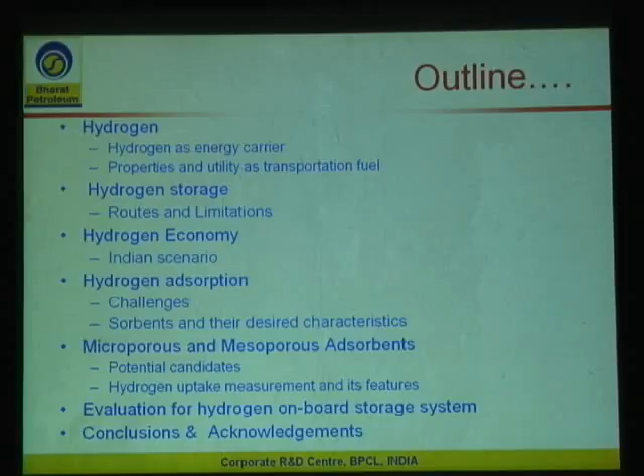Hydrogen, as you are aware, is an energy carrier and has got several advantages. It can be made from a variety of raw materials, including water splitting and fossil fuels, and has zero emissions at the point of use. However, depending on where you produce it or the starting material, if it is from fossil fuels, there will be emissions. Still, the overall well-to-wheel emissions, in both air pollutants and greenhouse gases, hydrogen gives you very low emissions compared to conventional fuels such as gasoline.

Fuel cell technology, for which hydrogen is fuel, is the major driving force for hydrogen economy and is fast emerging as a mature technology. So far the cost of fuel cells was a major impediment, but now the costs are really coming down, and this fuel cell technology is maturing very fast, and that is where hydrogen is becoming more and more interesting and important.

Another most important thing is hydrogen through fuel cells can achieve well-to-wheel efficiency of 22%, compared to 12 to 13% for gasoline and CNG in IC engine, and 18% for diesel in internal combustion engine. The overall efficiency from well to wheel, which is more important, is of course very high with hydrogen.

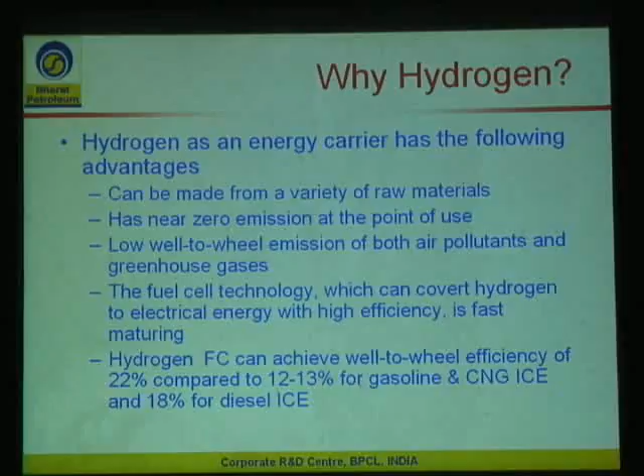Hydrogen as a fuel can be used both through fuel cells and in internal combustion engines as a direct fuel. When you use hydrogen as a direct fuel, there are advantages: characteristics such as low quenching gap, high diffusion coefficient, and wider flammability, which result in completeness of combustion, hence higher efficiency, and lean burn ability, leading to low NOx, which is very important. I will come to this practicality later, how this can be used along with CNG to reduce emissions in IC engines. It is also safe even in case of leakages in open air because of fast diffusion.

However, there are few problems when you use hydrogen in IC engine. High flame speed and low ignition energy are problems because they can lead to pre-ignition and backfire, which can be dangerous, and is unsafe if there is a leak in a closed space, like within a vehicle when it is closed.

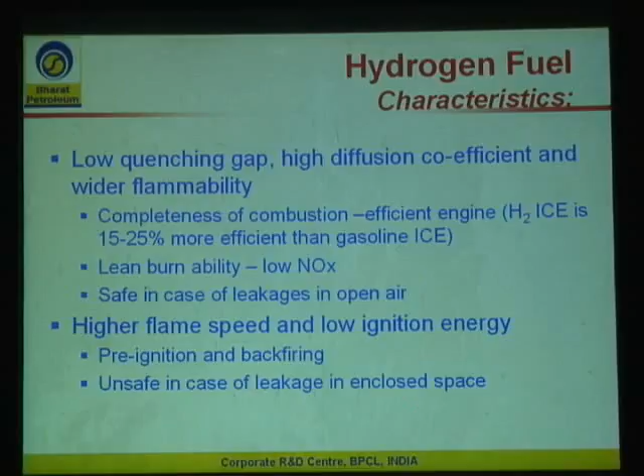The barriers to hydrogen economy are many, as you are all familiar, but onboard hydrogen storage today is probably one of the most important barriers which has to be overcome, which is the topic of today's presentation.

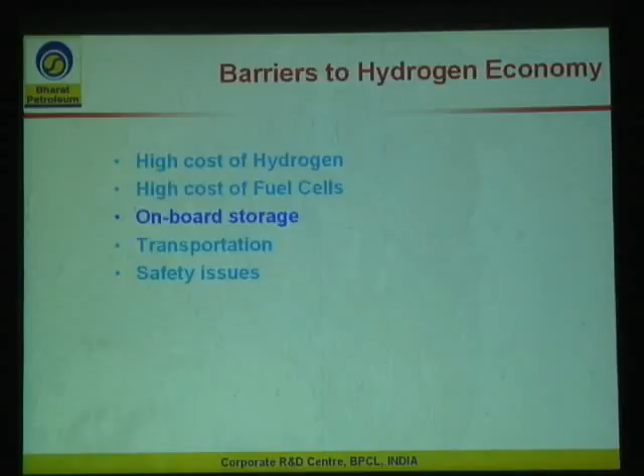Hydrogen storage limitations and challenges, probably you would all be aware, so I may not spend much time on this. I quickly go through. Weight and volume are the major problems. The hydrogen storage systems occupy huge volume and are very heavy. Efficiency is again a major challenge when you are looking at the storage systems. Whatever system you look at, whether it is compression, liquefaction, or storage in solid materials, you have to spend a certain amount of energy either to compress, liquefy, or to take out hydrogen from the storage materials.

Durability is important - those who are dealing with hydrogen storage systems on board would realize that it is not only important to have high capacity in the laboratory when the system is very fresh, but it has to sustain that capacity over a period of time, several cycles, and the ideal lifetime is 1500 cycles. Refueling time, of course, has to be fast enough. Cost is another major factor, and as developments take place, I am sure the cost will come down. And of course, as with any other fuel and systems, codes and standards will all emerge, and life cycle time and efficiency analysis in-depth study is required.

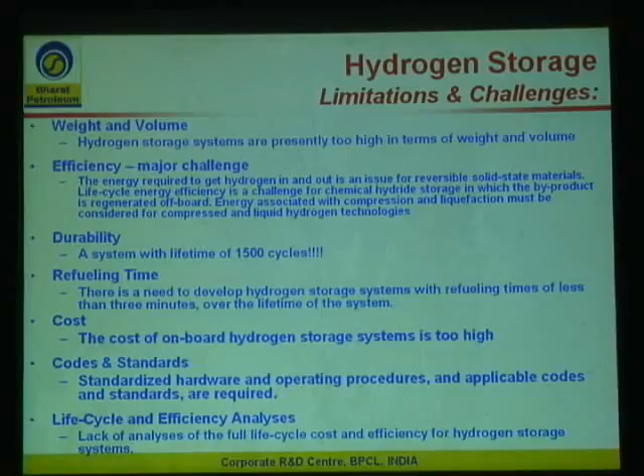Hydrogen storage targets, you are all familiar with - the earlier speaker also talked about this. I would just like to draw your attention here to these targets: one is 6 weight percent by 2010, and 9% further along, as the earlier speaker showed your targets as 6% by 2010.

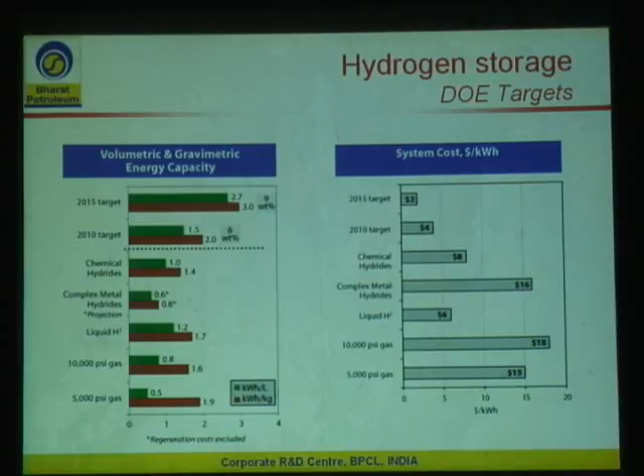In India, there are a number of research programs undertaken related to hydrogen economy. One of the important programs is the National Hydrogen Energy Board program of the Department of Non-Conventional Energy, Government of India. It is a 10-year program, and the expected budget is about equivalent to $70 million.

Ministry of Petroleum and Natural Gas, Government of India, has a 5-year program expected to spend about 20 million. This is mainly for oil industry refineries. Then there is CSIR, Council of Scientific and Industrial Research. The research initiatives there cover production, mainly autothermal, storage, including carbon-based storage materials, and of course fuel cells.

The other initiatives include the core group on automotive research, the REVA program, a private initiative. It's a private company in India producing electric vehicles running on batteries recharged from grid power. They are now working on fuel cell based hybrid vehicles. And Benares Hindu University has been working for a very long time on metal hydride storage.

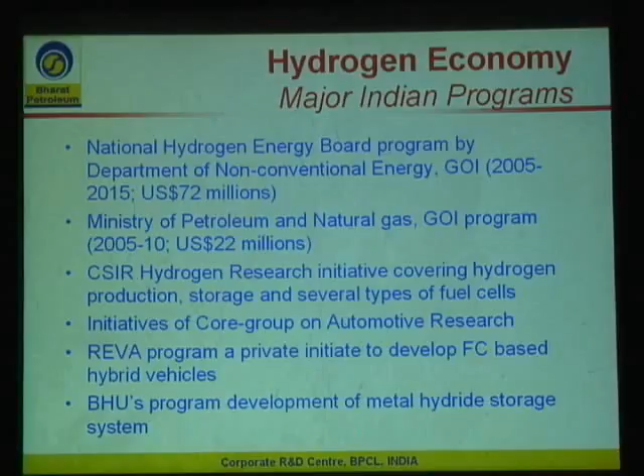The National Hydrogen Energy Board programs have 3 types: short term, medium term and long term. Under short term, use of 10% and 30% hydrogen in admixture with CNG in buses and small and large three-wheelers. This program is for about 2 years.

In India, CNG is picking up very fast, and in New Delhi there are more than 10,000 buses. All public transport runs on CNG - taxis, three-wheelers, and buses. This is now extended to other cities. When we switched over from gasoline and diesel fuel to CNG, it has definitely brought down pollution with respect to particulate matter, SOx emissions, CO and things like that.

But NOx is a problem there. In fact, there are contradictory studies that show even NOx emissions have increased with CNG. When you mix hydrogen with CNG, 10 to 30%, some studies showed that there is considerable reduction in NOx emissions.

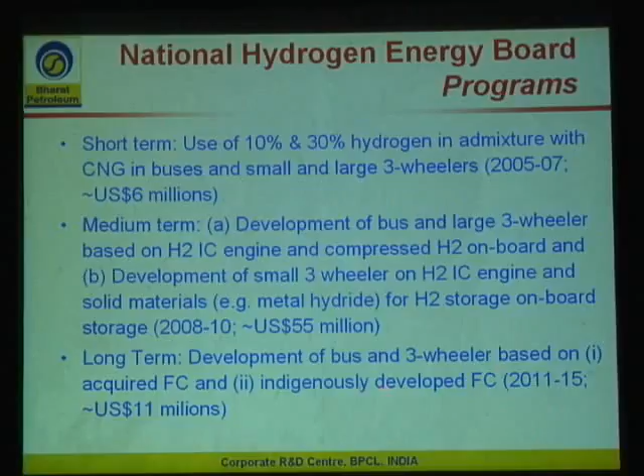Long term, of course, bus and three-wheeler. Three-wheelers you see everywhere would be coming because the population of three-wheelers is pretty high in India. Initially, of course, this would be acquired fuel cell technology, and later on indigenous development. These are the programs.

The next important program is by the Ministry of Petroleum and Natural Gas. Here the focus is on production, storage and distribution, and of course application-oriented research in IC engine three-wheelers, and examining the economics of use of metal hydrides and fuel cells from a long-term perspective. These are some of the programs which the Petroleum Ministry, mainly the oil companies - I come from Indian Bharat Petroleum Corporation Limited, the refining and marketing company - we are also working in these areas.

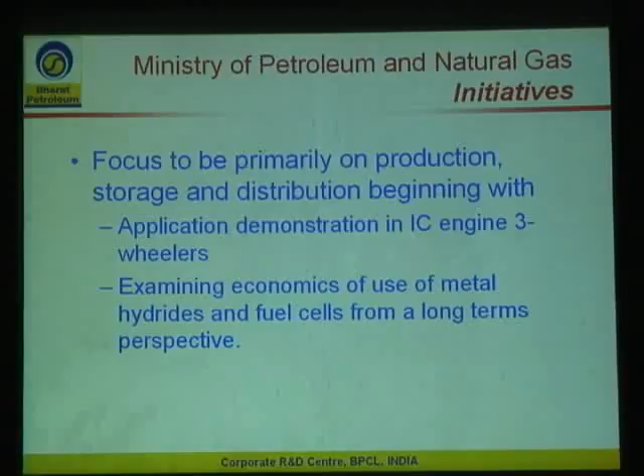The other program is from the auto industry, the Society of Indian Automobile Manufacturers. They have a program to develop hydrogen IC engines and demonstrate a fleet of about 1,000 vehicles by 2008, including 200 buses, 500 small three-wheelers and about 300 big three-wheelers.

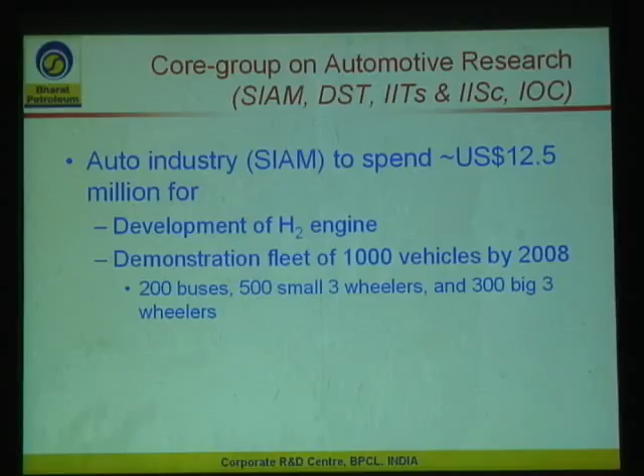At Bharat Petroleum, where I am working, our corporate R&D center has undertaken research programs on development of materials for hydrogen storage - adsorbents based on physical adsorption, mainly microporous and mesoporous materials, and complex hydrides, metal hydrides and complex hydrides. A pilot study using a three-wheeler onboard with compressed hydrogen in cylinders and metal hydride canisters. I am going to share some of our results on this.

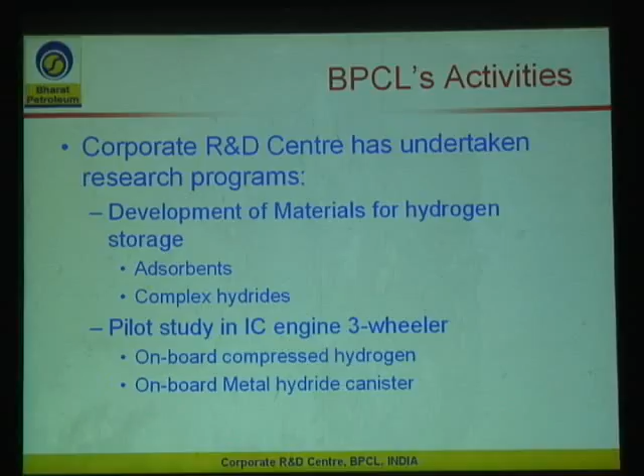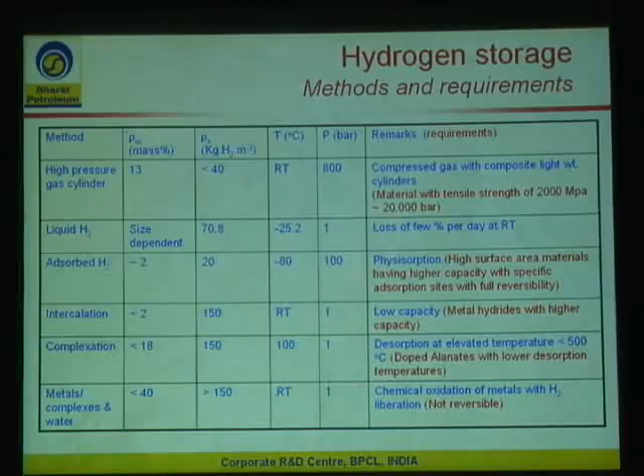Hydrogen storage materials - maybe you are familiar with this. With lack of time, I would skip this slide.

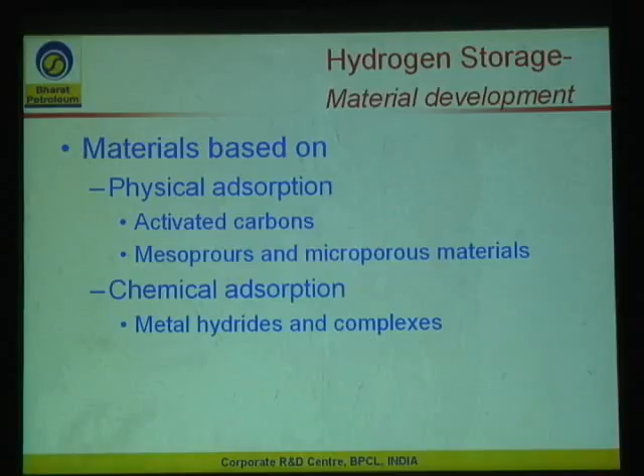The materials based on physisorption, some of the materials which we have evaluated or synthesized and evaluated, are activated carbons, mesoporous and microporous materials, and of course metal hydrides and complex metal hydrides. I am not going to give much on complex hydrides because it is very recent work.

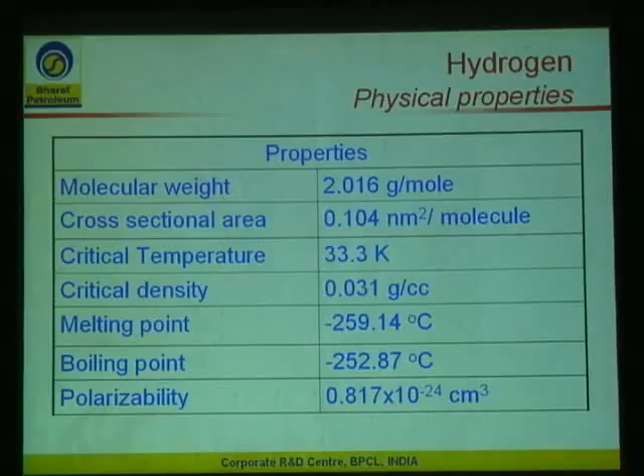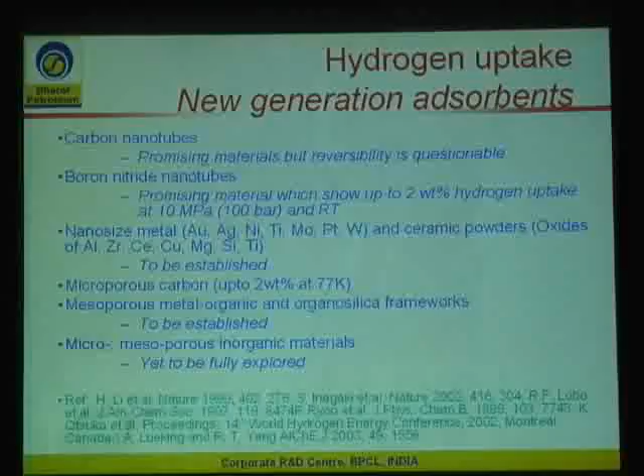The number of new generation materials are there which are coming up and which are being investigated. I would like to skip this because earlier speakers and speakers later on are also going to cover a lot of these aspects. It will be more of repetition.

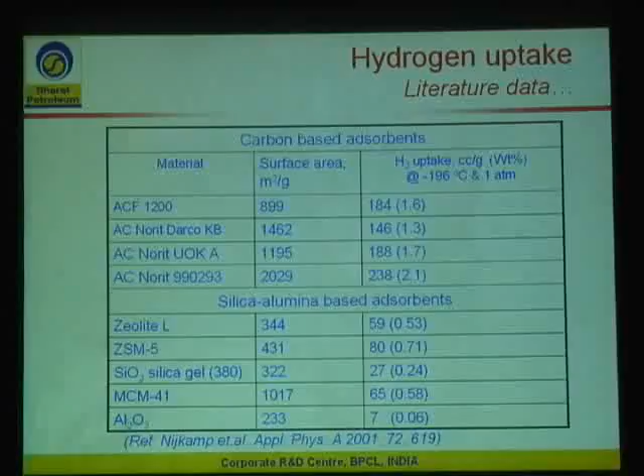With respect to physisorption based materials, I would like to show this slide, from literature, reference given here. Among all these materials, activated carbons are showing high capacity, and this particular Norit carbon shows the highest so far reported. The ZSM5 is another material showing higher capacity among these, though as such these capacities are pretty low. What this shows is that only those materials where the surface area is high have higher capacities. Here the surface area would be of the order of 2000 plus.

In our laboratory, we will try to look at some new microporous and mesoporous materials which show some promise in hydrogen adsorption capacity. Particularly these nickel-based phosphates are interesting because these have got unsaturated nickel 2 plus in the framework, which can have specific interaction with hydrogen, and hence we synthesized VSB5, which is thermally stable, a 24-membered ring microporous framework with a pore diameter of about 1 nanometer, having hexagonal symmetry structure, and nickel to phosphate framework ratio can be varied.

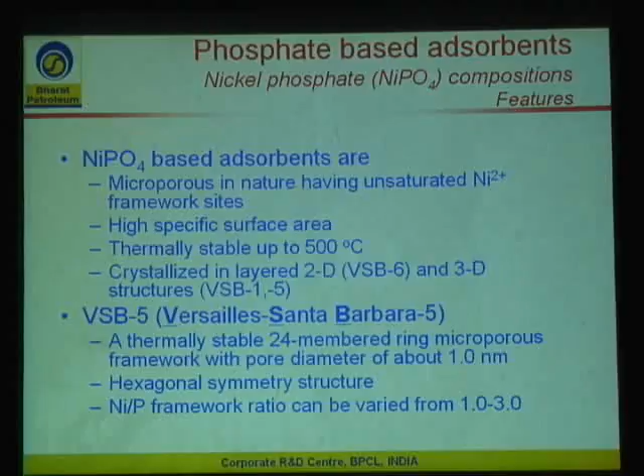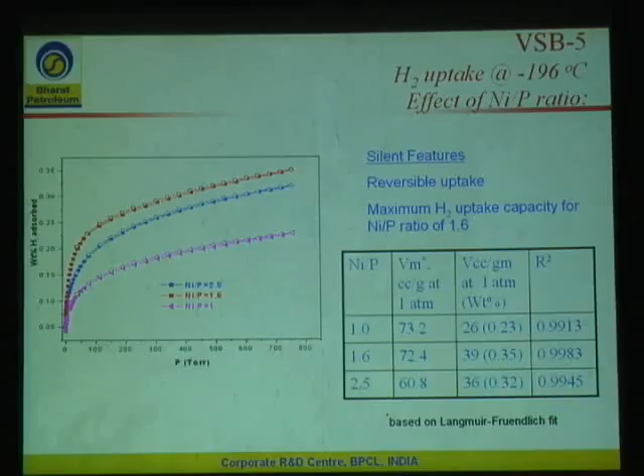Actually, we synthesized in this range. Surprisingly, these materials did not show good capacity. The maximum that we could get is 0.35, which is pretty low.

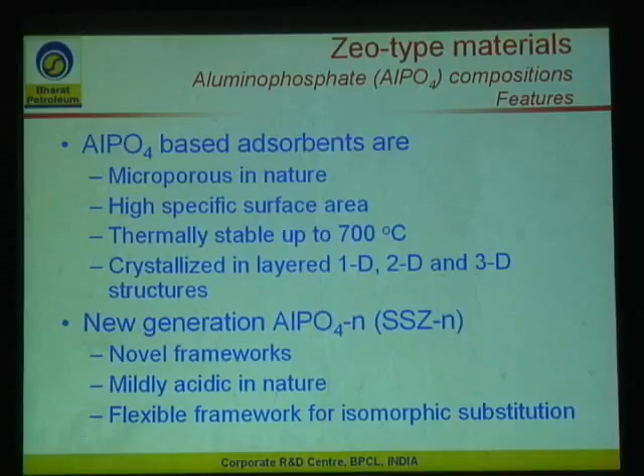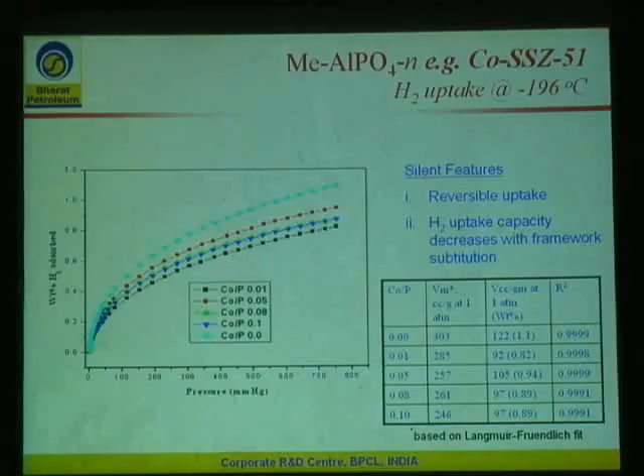Then the other materials which we have looked at are aluminophosphates. In particular, I would like to draw your attention to the SSZ series. These are very new materials reported in the literature. We have worked on SSZ51, and this material showed about 1.1 weight%, which is the highest compared to any other inorganic porous materials reported in the literature. These are preliminary results. Now we got results which I am not able to share with you; we need to repeat some of those. We are optimizing the synthesis conditions, and we are getting far better results here.

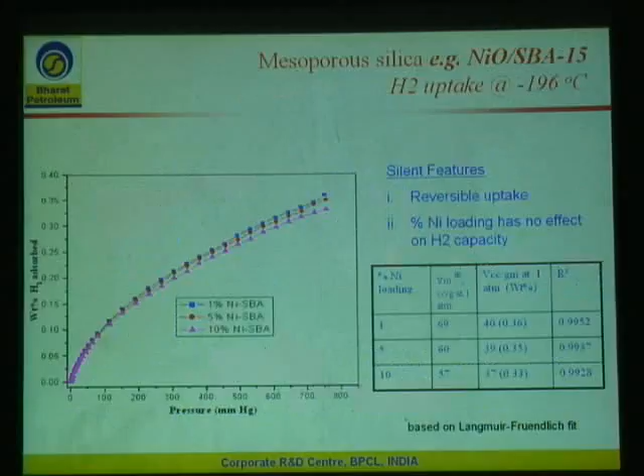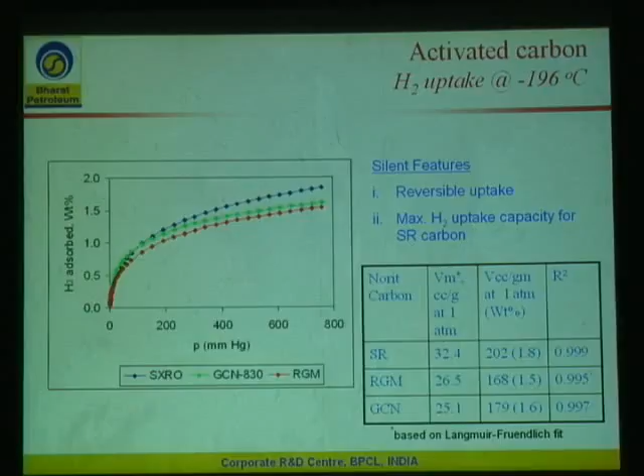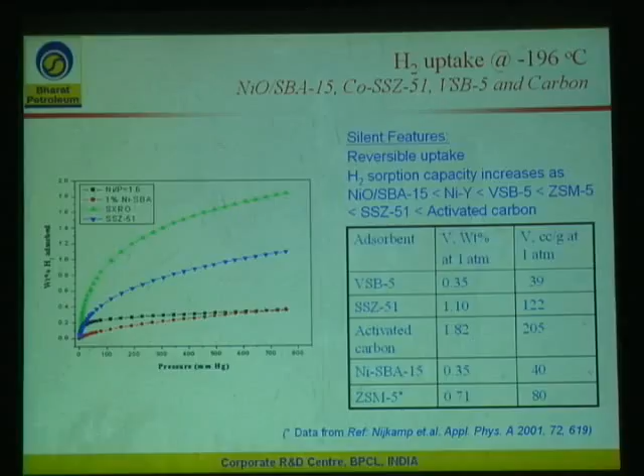Other materials, MCM 41, SBA 15 did not show much capacities. Activated carbon samples we evaluated are comparable to what is reported in the literature. This is the comparison of various materials which we have evaluated in our laboratory or synthesized, and this, taken from the literature, is the ZSM-5. The SSZ here compares favorably with other inorganic materials. SSZ series 54 is another material showing even better performance than SSZ 51, which I could not include here.

To summarize whatever has been presented so far: a reversible hydrogen uptake at minus 196 degrees centigrade, which of course has to be taken to room temperature. It's easier to measure at 77K initially, and after screening and having better materials, moving to room temperature becomes easier. That is how most people do it. Aluminophosphate compositions have shown about 1.1 or more, and activated carbons about 1.8%. The minimum hydrogen uptake is observed for mesoporous silica-based materials; other materials showed very low uptake.

To have better insight on specific adsorption sites and their optimization, better synthesis strategies are required to improve uptake capacity. Here we need to do some simulations before even undertaking the synthesis. This is what we are going to do. Otherwise, we are unlikely to have better materials.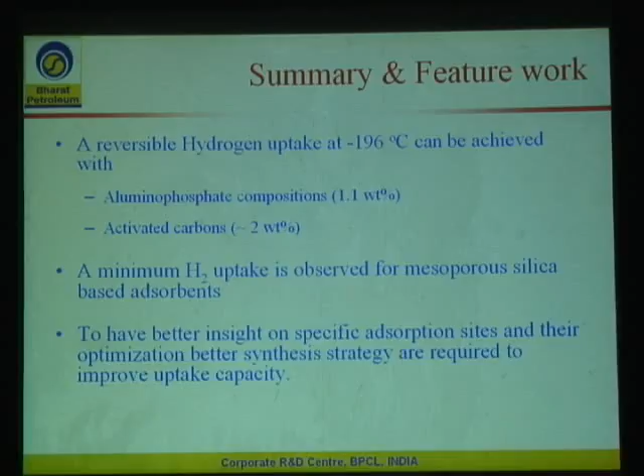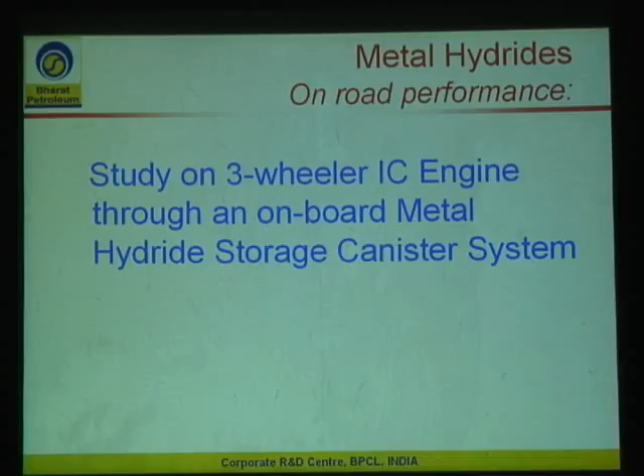I have a few more slides where I am going to present the performance of an onboard metal hydride storage canister system which we have evaluated in a three-wheeler. Metal hydrides, we have two programs: one is on metal hydride evaluation, having about 1 to 2% hydrogen capacity, and complex metal hydrides, we are working on this particular system, lithium amide, which has shown promise. Of course, there are issues with respect to reversibility, which we are trying to address by doping some dopants which act as catalysts to improve the sorption kinetics, particularly the desorption kinetics.

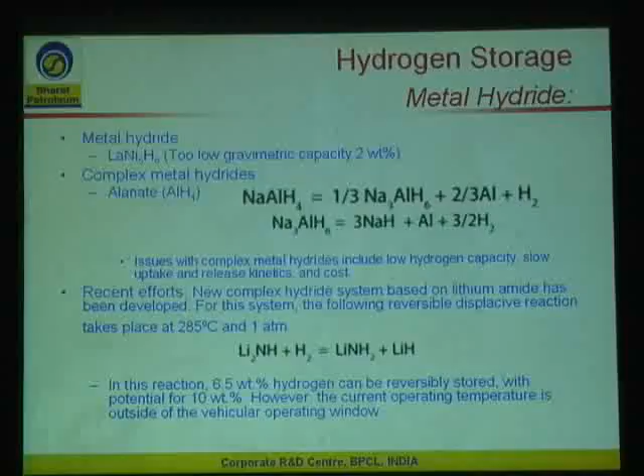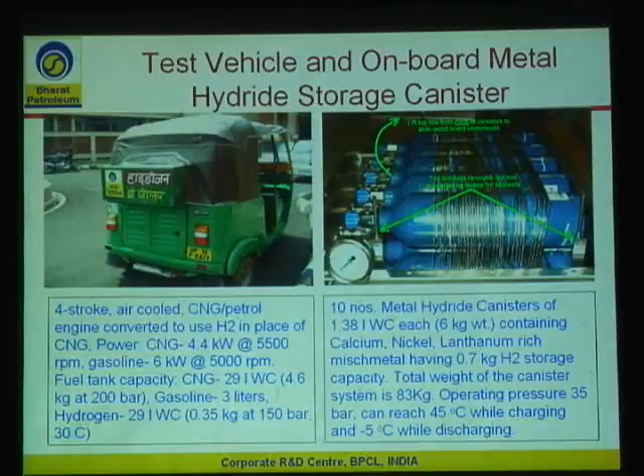The preliminary results from this study show that fuel consumption is very low with hydrogen. It gave about 140 kilometers per kg of hydrogen, and in gasoline equivalent that's about 38, compared to CNG 26 and gasoline 25. The fuel economy with hydrogen compared to CNG is almost 1.5 times. However, the acceleration is pretty slow.

Maximum speed that we could attain is just 35 kilometers per hour, compared to 60 for CNG and 65 for gasoline. Time taken to cover 1 kilometer is 175 seconds, versus 124 and 105. These are the comparisons, and the change in acceleration compared to CNG is almost 41% lower with hydrogen.

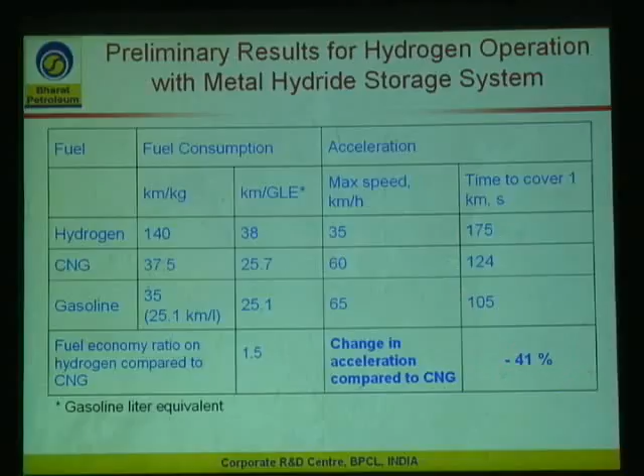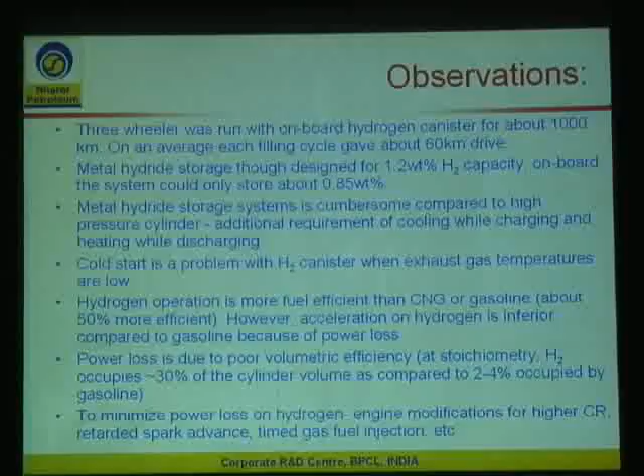Further observations: the three-wheeler was run with an onboard hydrogen canister. We have run about 1,000 kilometers on average. Each filling cycle gave about 60 kilometers of drive. The metal hydride storage, though designed for 1.2 weight percent hydrogen capacity on board, the system could only store about 0.85 weight percent, and this over a period of time can further go down.

This is what I was telling you. It is not only important to have a system which may work in the laboratory with high capacity, but when you go to the field, that is where it has to sustain. Otherwise you will still have a problem.

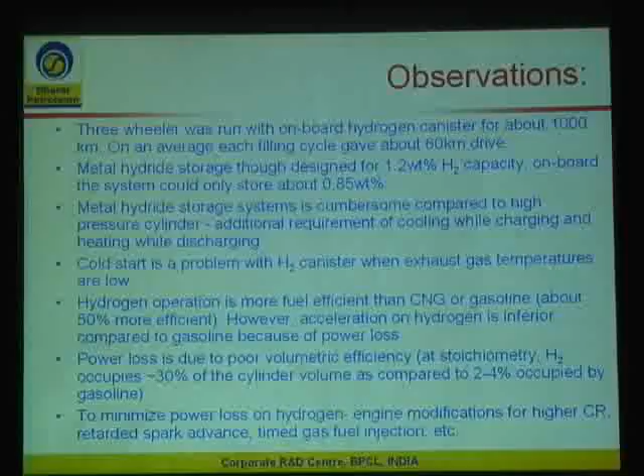Metal hydride storage system is cumbersome compared to high pressure cylinder, with respect to the present system. Please do not generalize - there are a few things which are specific to this particular system, and these results are specific only to this three-wheeler which we have evaluated. So I do not want you to extrapolate and generalize to other systems.

Metal hydride storage system is cumbersome compared to high pressure cylinder, because the capacity is very low and it is very bulky - 83 kgs is the entire system weight. That itself is pretty large, an additional load on the unit. And cold start is the problem with hydrogen canister when exhaust gas temperatures are very low, so you have to have a mechanism there.

For hydrogen operation, what we were doing is we start with other fuel and then switch over to hydrogen when you have enough temperature in the exhaust system. Hydrogen operation is more fuel efficient than CNG or gasoline, about 50% higher efficiency, which we have seen in this. However, acceleration on hydrogen is inferior compared to gasoline because of power loss.

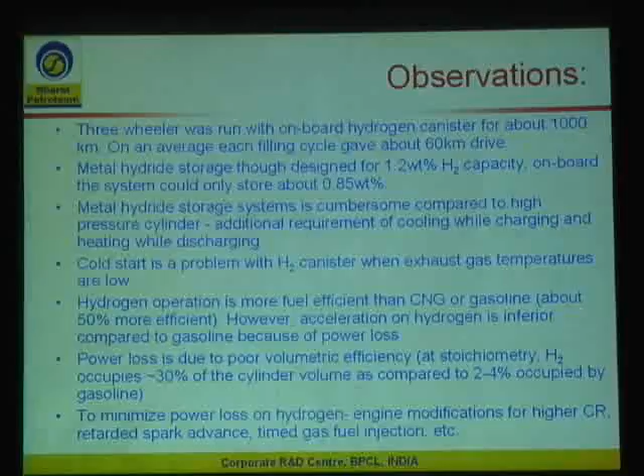Power loss is due to poor volumetric efficiency - about 30% of the cylinder volume is occupied by hydrogen as compared to 2 to 4% occupied by gasoline. This is because the volumetric density of hydrogen is pretty low. So the engine itself has to be designed to have higher compression so that hydrogen occupies less volume and you can have more oxygen in the system. Otherwise most of the cylinder volume is occupied by fuel itself, so power is pretty low here.

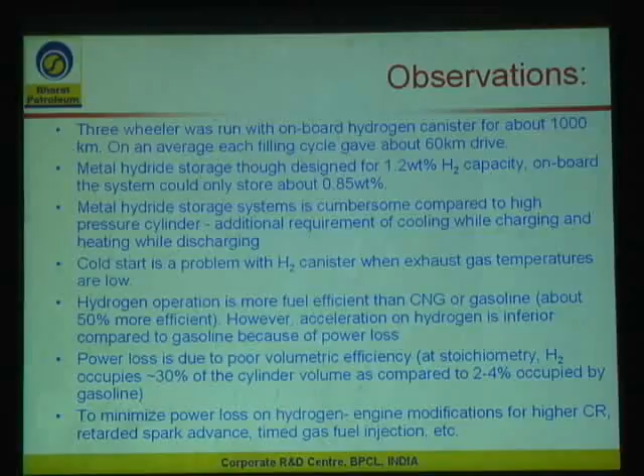This is what our engine experts have concluded. To minimize power loss on the hydrogen engine, modifications for higher compression ratio, retarded spark advance, and timed gas fuel injection are the modifications our people have concluded and are about to do. These changes are planned.

In conclusion, onboard storage is one of the major barriers for the hydrogen economy. In the long term, solutions are expected from sorption-based storage systems. I am very sure that though as of now we are far away from the real targets, the type of research that is happening and the type of initial results being reported gives me confidence that we will have a solution in the near future for hydrogen storage in the form of novel materials.

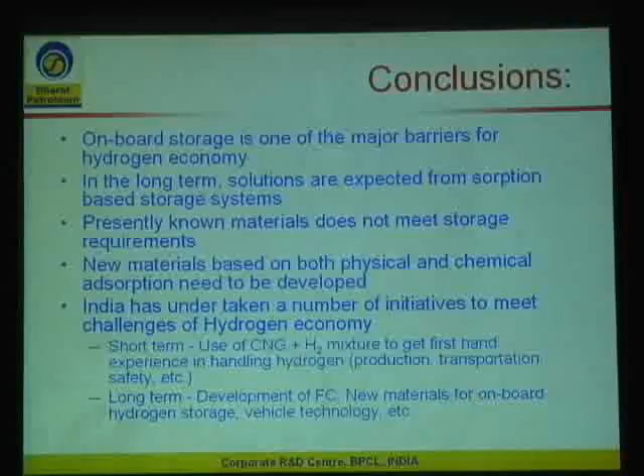Presently known materials do not meet storage requirements. New materials based on both physical and chemical adsorption need to be developed, which is happening everywhere in the world. India has undertaken a number of initiatives to meet the challenge of hydrogen economy. In the short term, India is focusing on CNG hydrogen admixture to get first-hand experience in handling hydrogen, including production, transportation, refueling, safety, etc. In the long term, development of fuel cells, new materials for onboard hydrogen storage, vehicle technology, etc. are also being taken up in parallel.